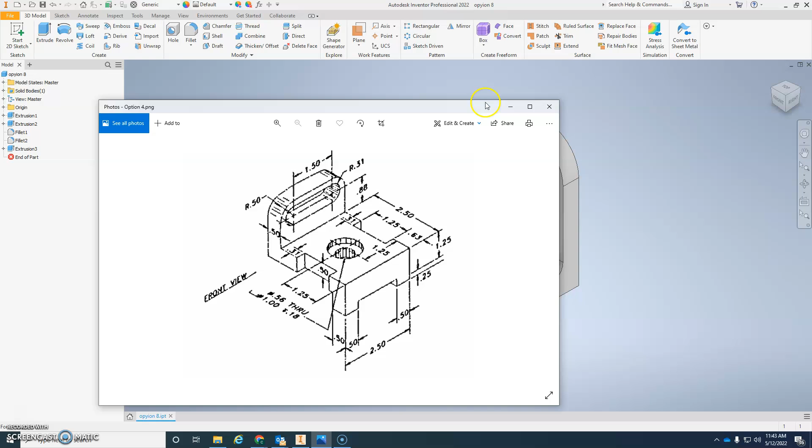Option 8. This is not a difficult one to do, very simple. Let's open a correct drawing for that one. This is our option 8 right here. Let's go and look at this. This is really simple.

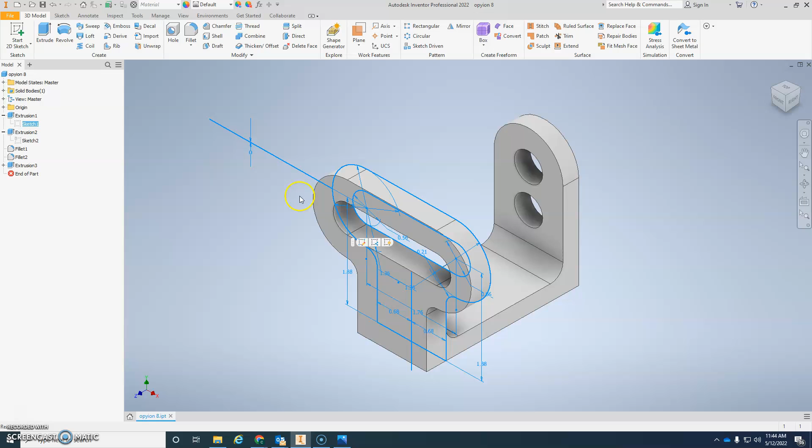I did it in multiple parts. I drew the first part and extruded it, then drew another part and extruded that onto the side, then did my fillets and my holes. Let's do that. My first part was there.

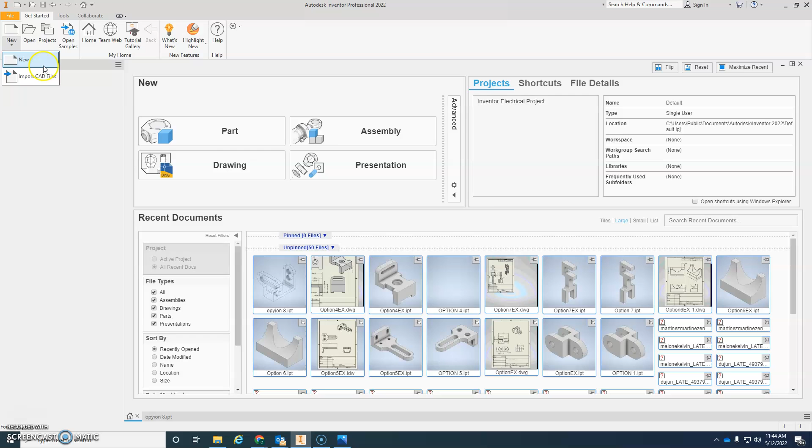Let's go back home. New part, millimeter, metric, create. The very first thing I did was draw this and constrain it. This is easy. We have two circles, a circle inside and a rectangle, and then we'll fillet those last edges last.

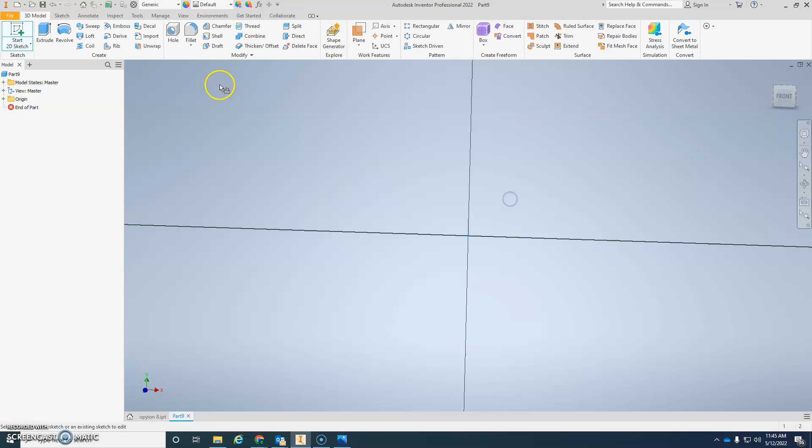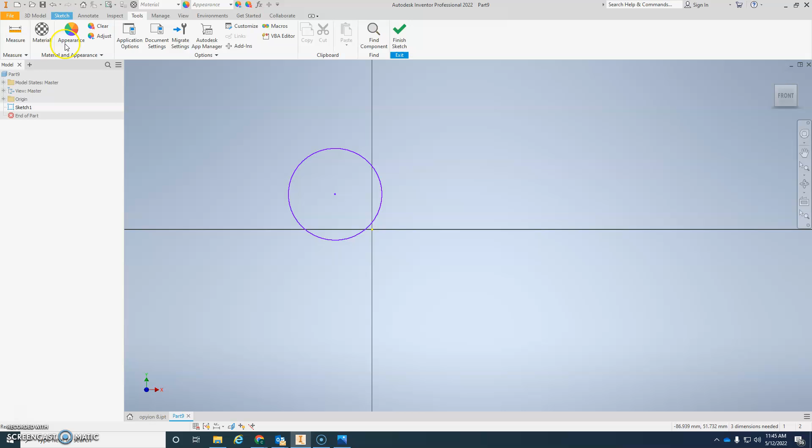Let's get started. Start your sketch. Let's do a circle, a bigger circle. Oops, before we do that, let's go to tools, document settings, and put that at millimeter. That will work fine for this one. It's the other one where we had all the tools, document settings, units, meter, apply, close. Back to sketch, more of the circle.

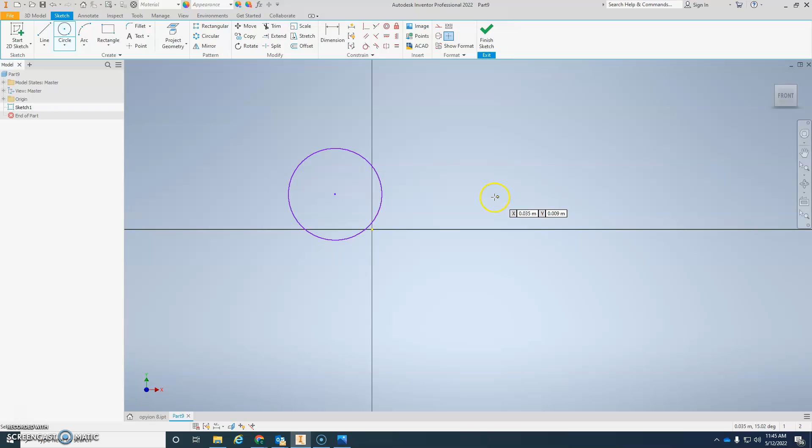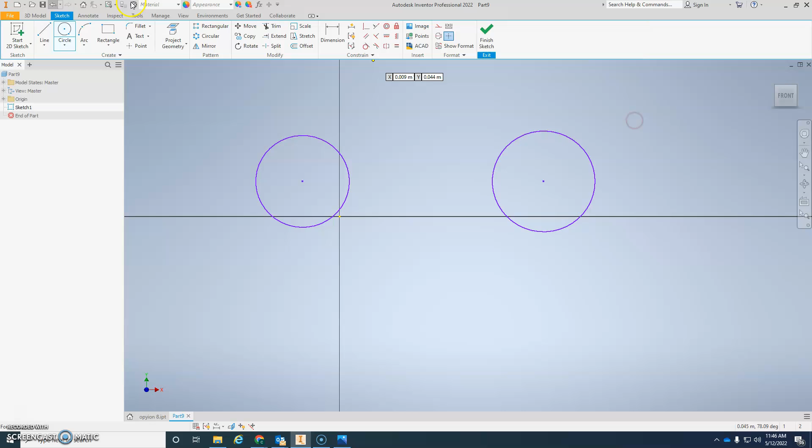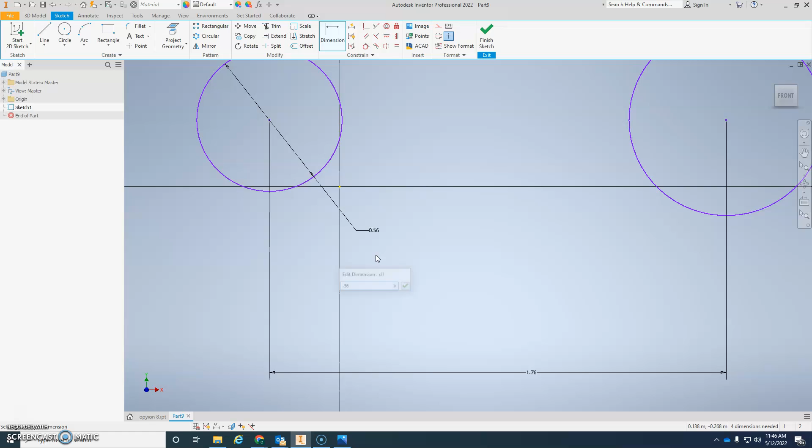Let's make sure that they're on, and another. The distance between the two is 0.88 and 0.88, 1.76 distance between the two of them. The radius of the inner circle is 0.28. This one is 6. We have another circle, this radius is 0.68.

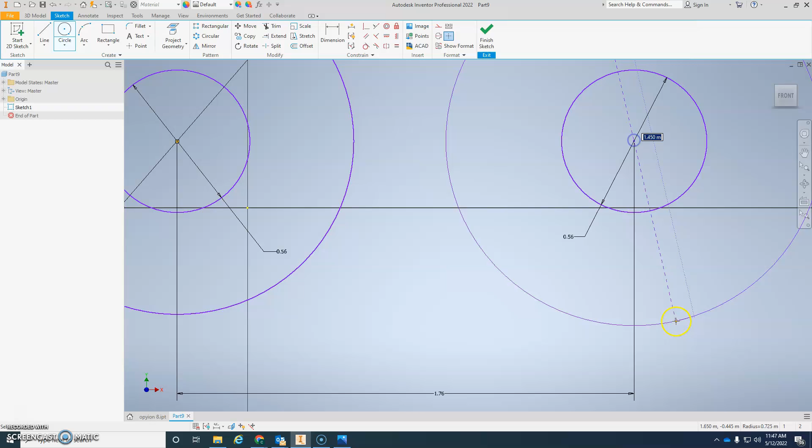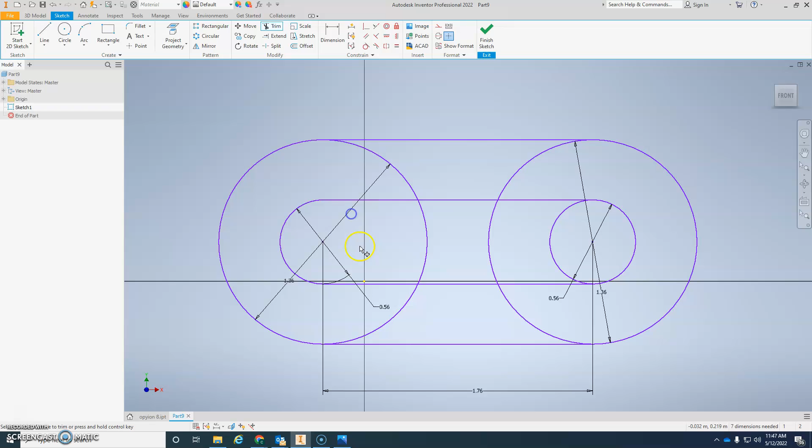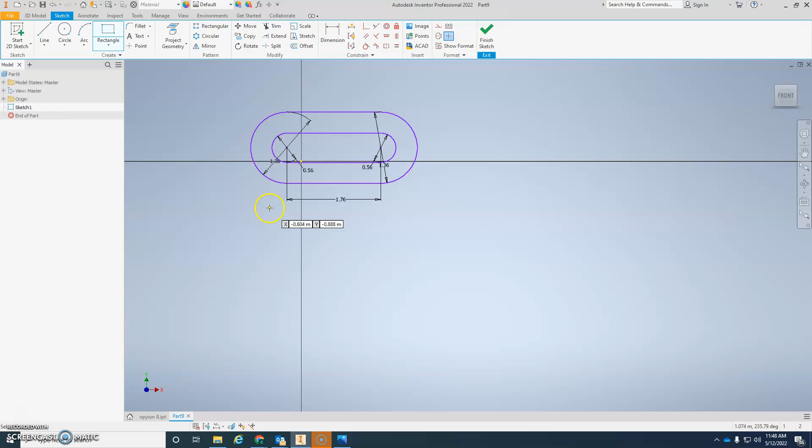Now we need to do a rectangle with a distance of 1.88 and 1.36. Let's go ahead and do that. Rectangle. The distance between the center and here is 1.88. Distance between here and here is 1.36.

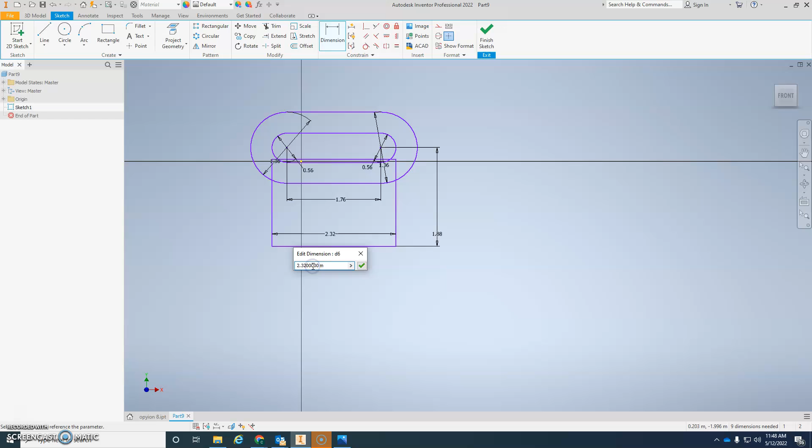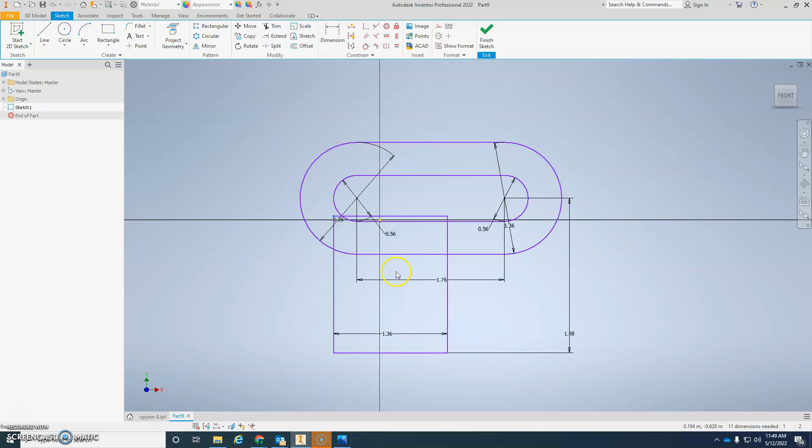I need to get rid of the coincident constraint. If you haven't already done this on one of the harder ones, there's a coincident constraint to remove. Delete. Again, and we have this. So the distance between this and the center line, 1.36, that's 1.88, and the distance between this and this needs to be 0.

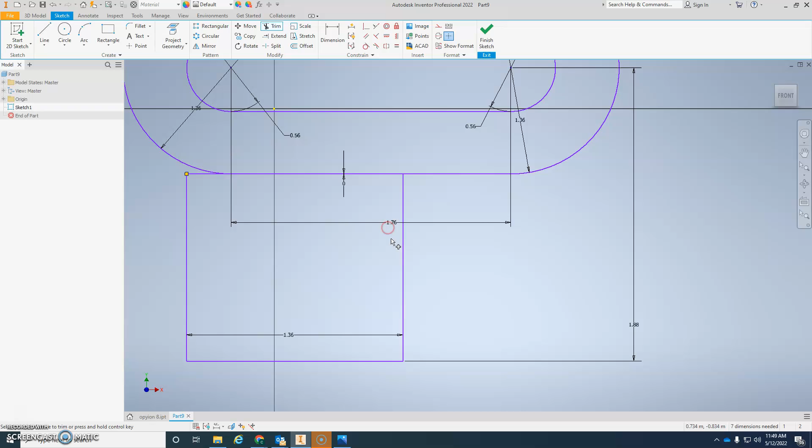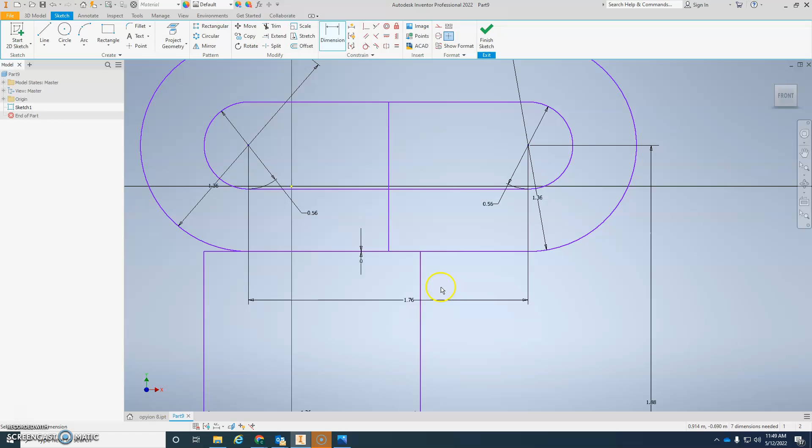Let's go ahead and trim this, and set the distance between the center line and the edge to 0.68. Let's draw a line to the center line.

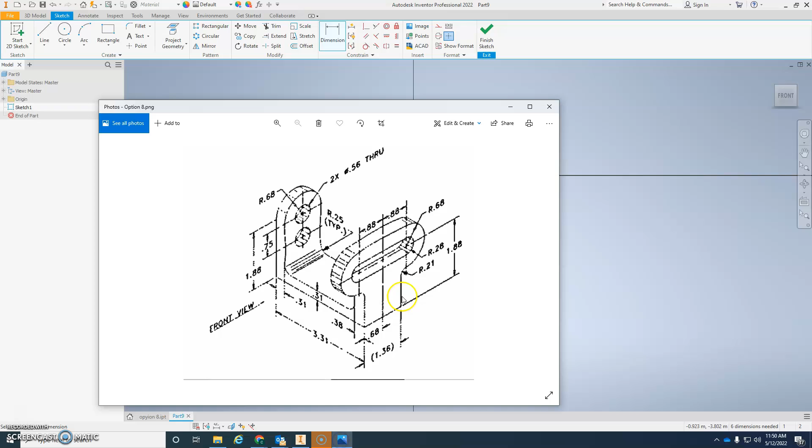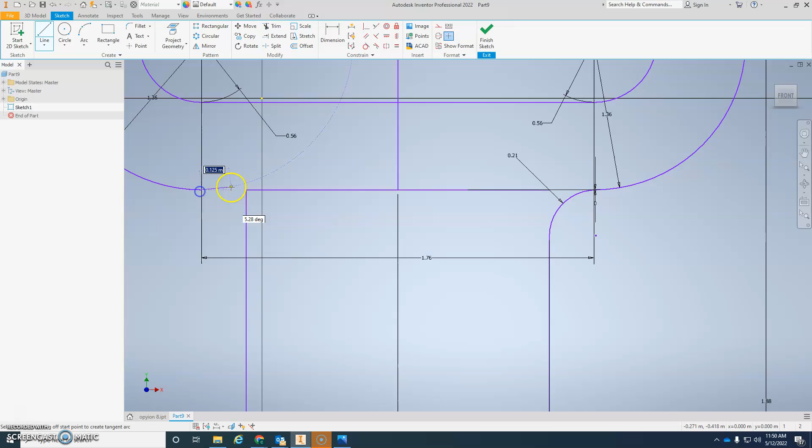Now the last thing we need to do is fillet this at a radius of 0.1. Extend that, cancel, draw a line here because I filleted it off. Fillet this and this. Okay, get rid of this line and this line because we don't need them. Now we have our shape that we can extrude.

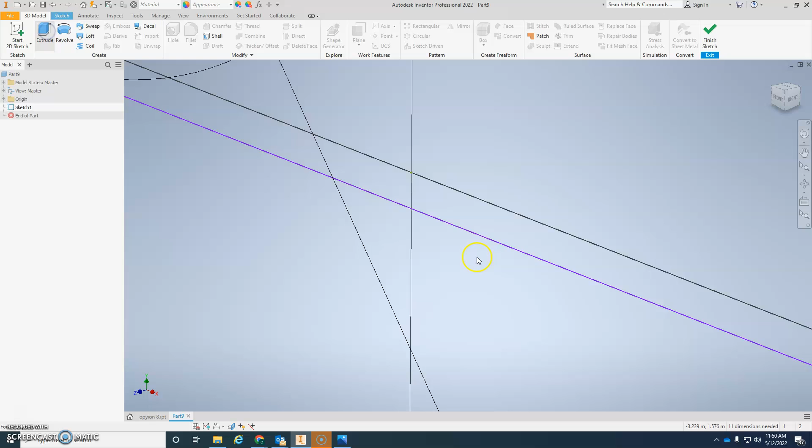Extrude this. Our distance that we are extruding it by is this distance right there, which is 0.38. And there's that part of the front hook. So back there.

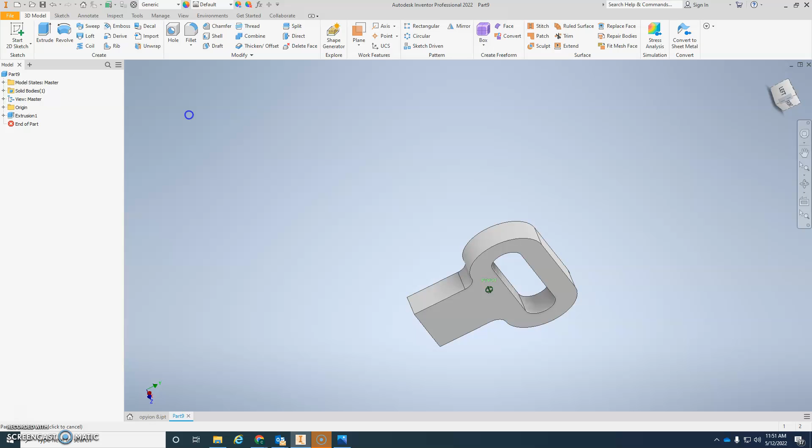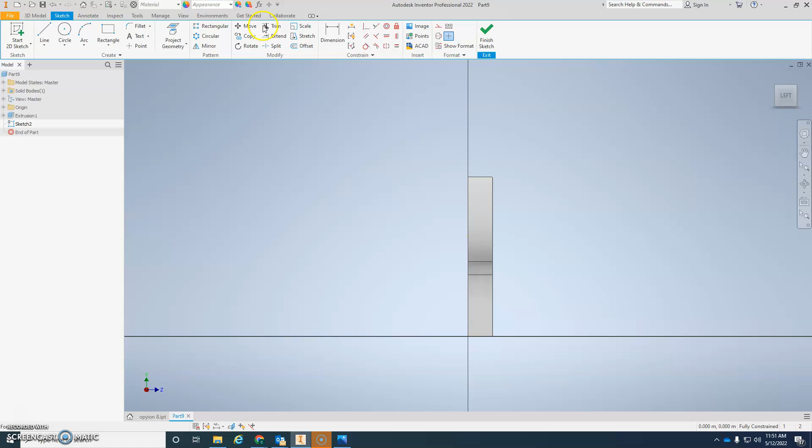I'm going to go ahead and start a new 2D sketch on this side, and we are going to draw the rest of this L shape. I like rectangles because they make it so much faster to do anything else. Then I need to go ahead and fix this.

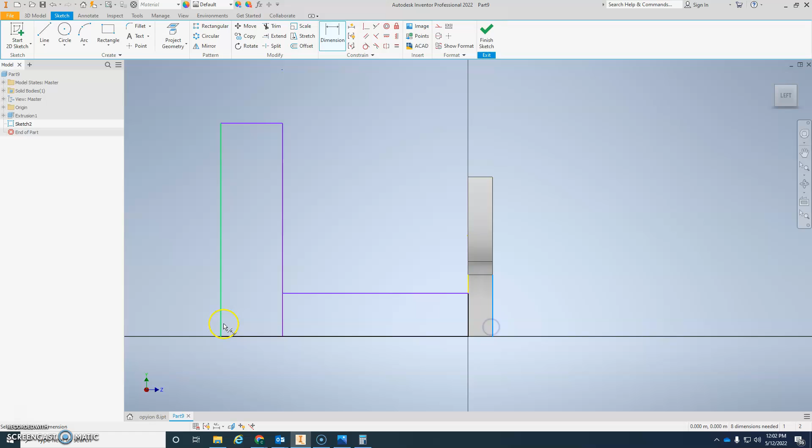Alright, our total distance from here to here is 0.31. Let's dimension here to here. 3.31. Actually, let's undo that and do a bit of math.

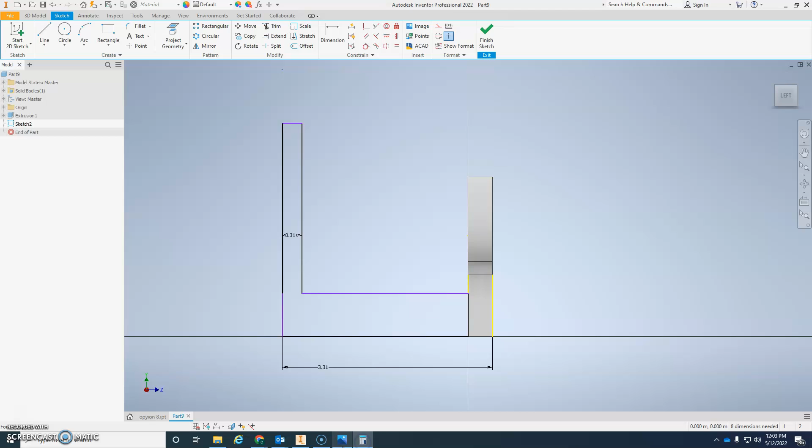We know the distance between here and here is 0.31. Distance between here and here is 3.31. Let's trim this, and set our distance. This is also 0.31.

That's already set at 0.38, and the total height between here and here is 1.88 plus the larger radius of 0.68. So the total height is 2.56. Let's do that.

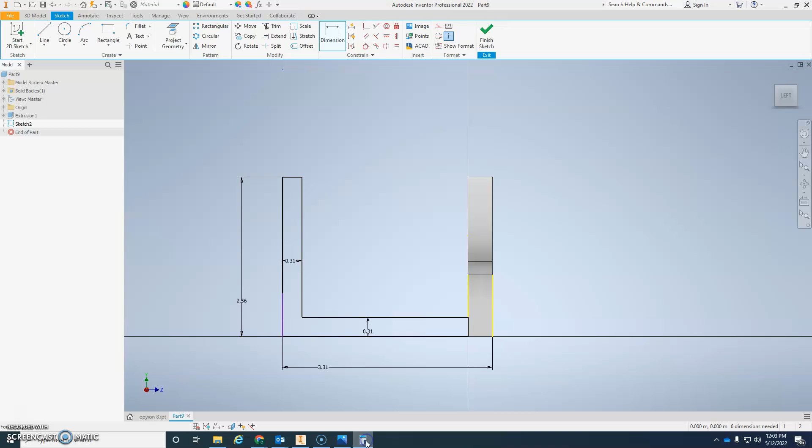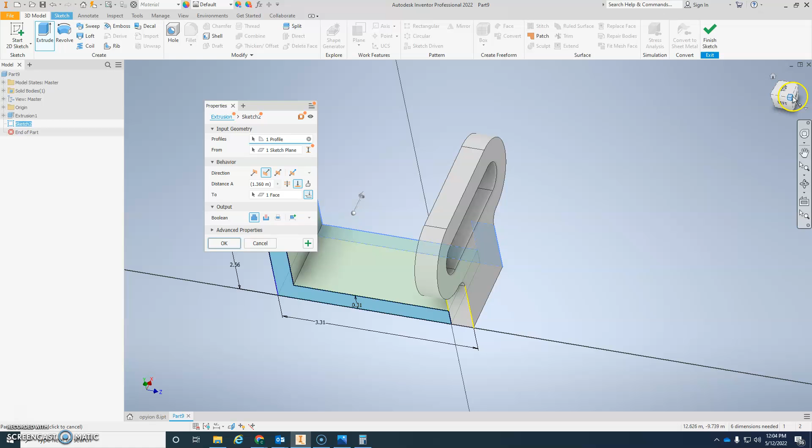And there's that, so now we can extrude this shape. Look at it in the 3D model. We want to go all the way to this edge. Let's go back. Now we have the front.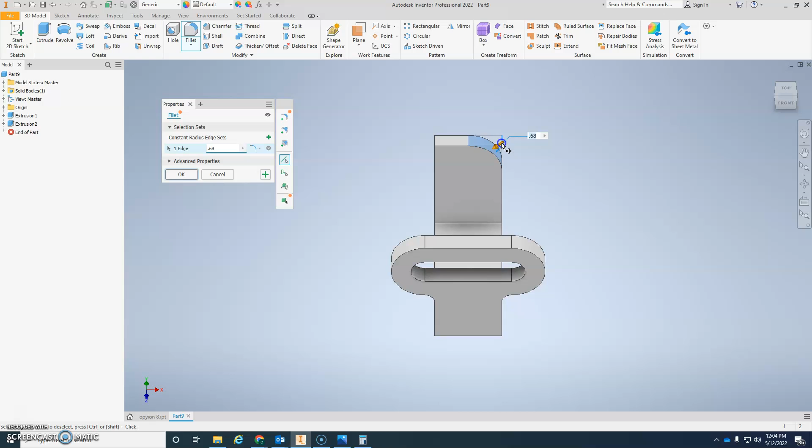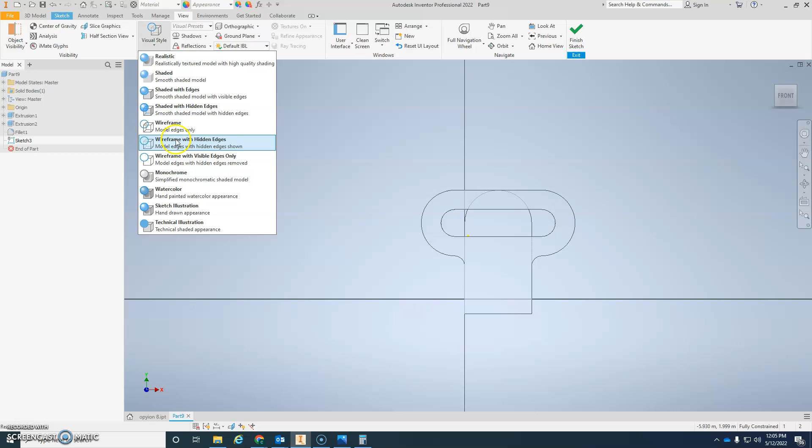That shape, and we're going to radius those edges off at 0.68. Let's go ahead and do our holes. Start a 2D sketch on the surface, and let's change the view and visual style to wireframe model edges, hidden edges, so all my edges are there.

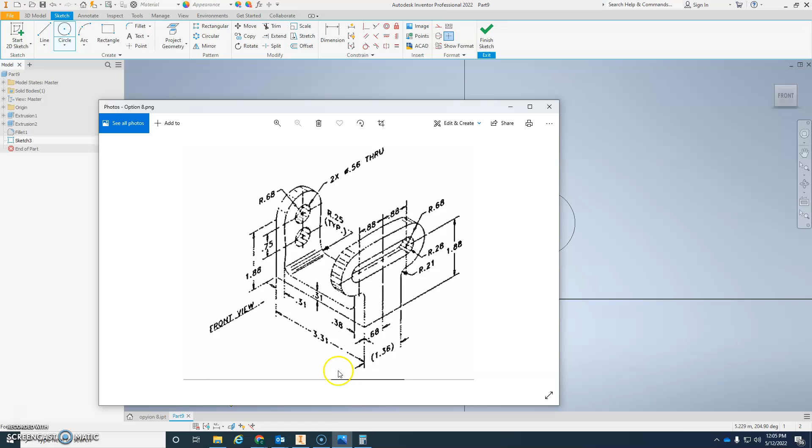Now in my sketch I can do my circle, my first circle right there on the same center line, and my other same circle. Let's put some dimensions with this: 0.56 and 0.56. The distance between the big circle and the little circle is 0.75. Let's do that.

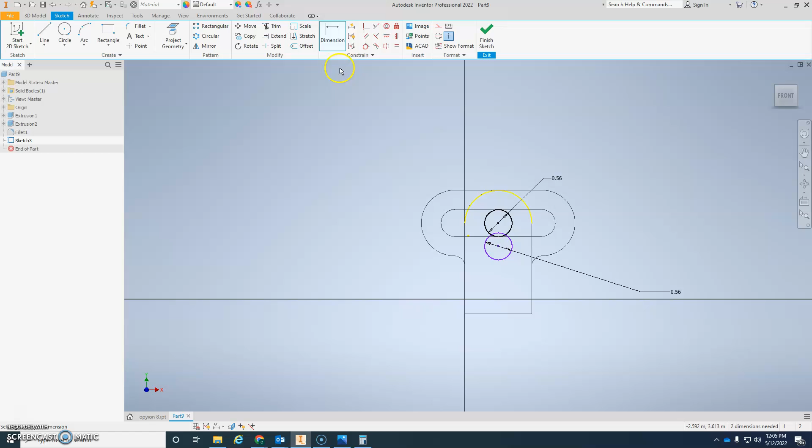This is a dimension. This is also 0.56. Distance between them always make sense, and that should be sketch.

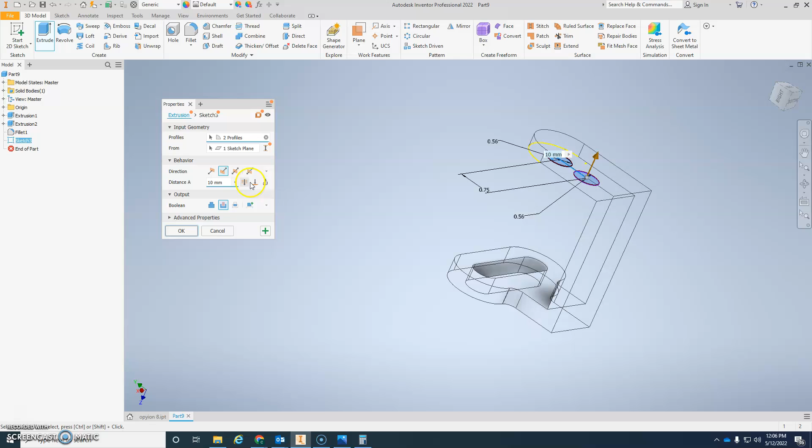Then we can extrude this one and that one, and we're going to cut it, go off. Now we have a view, visual style, realistic. There's our shape, and that was fairly easy.

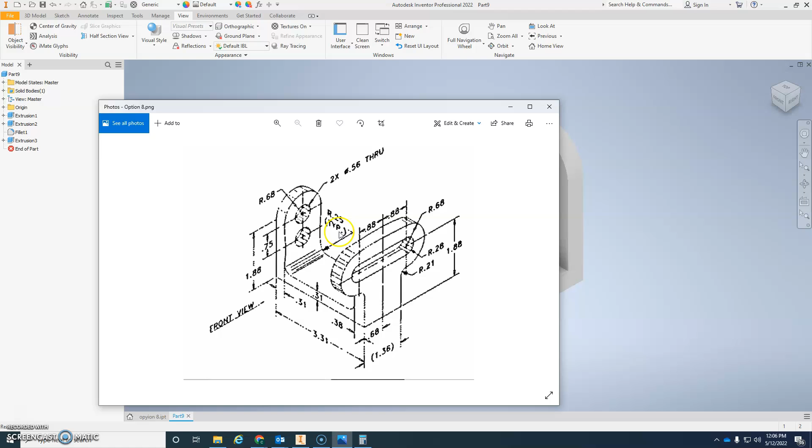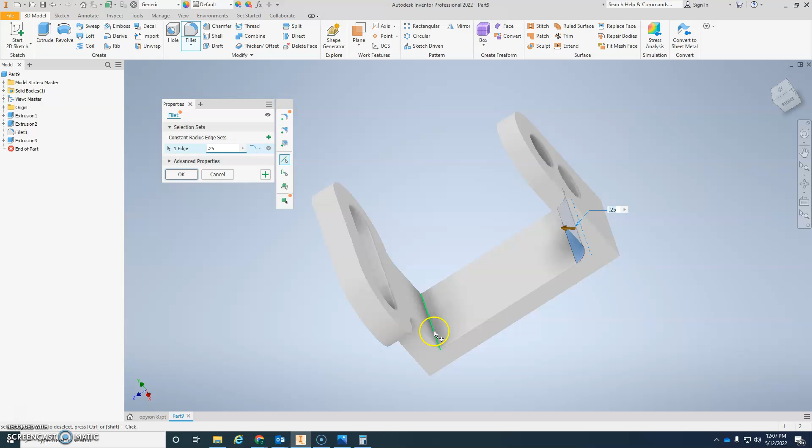The only thing we're missing is to fillet those last two edges of this corner right there, with a radius of 0.25. Let's do that, same method. 0.25. Let's select this edge and go ahead, make sure we get the right one. That edge. Okay.

And we can now save it and make our drawing file. And now we can make our drawing.